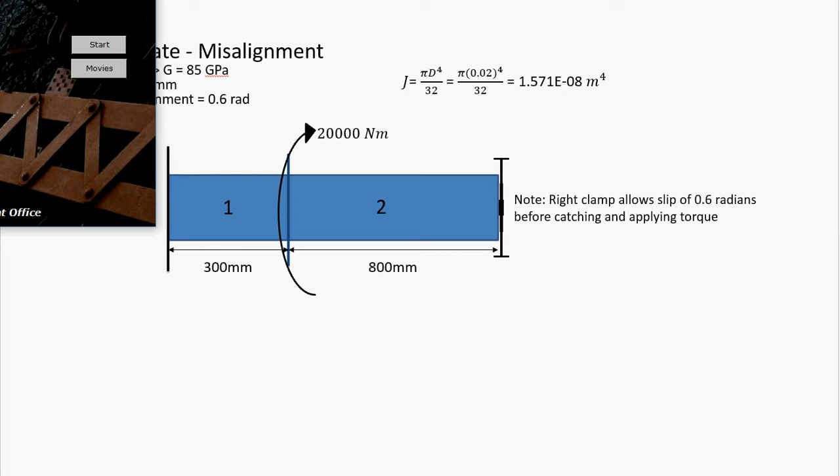So we're going to go through the standard 3 or 4-step process, and how you factor in this amount of slip or misalignment really comes down into the equation where you calculate the reactionary torque in the right clamp. So let's go ahead and get started and solve through this problem. So we can bring up torsion.

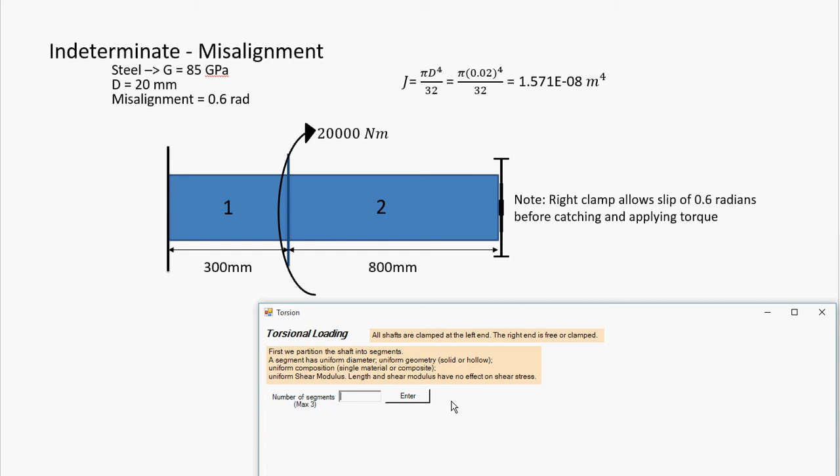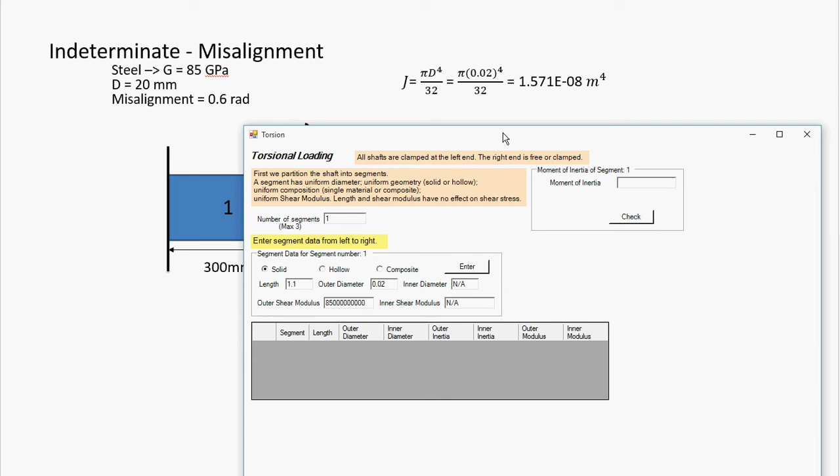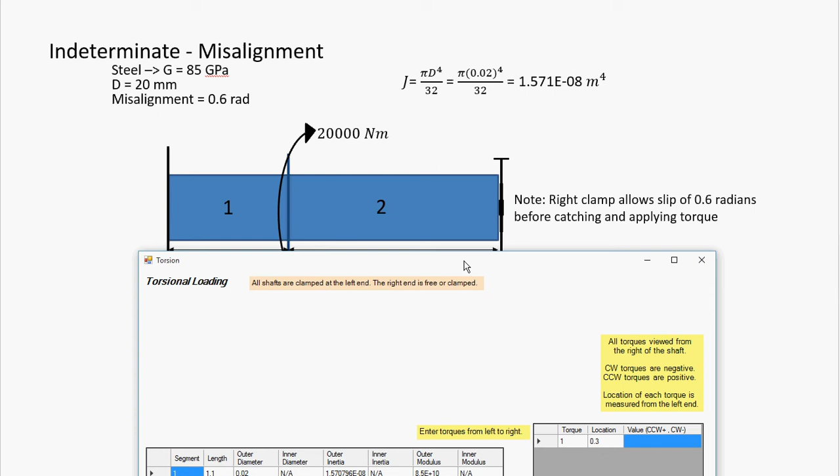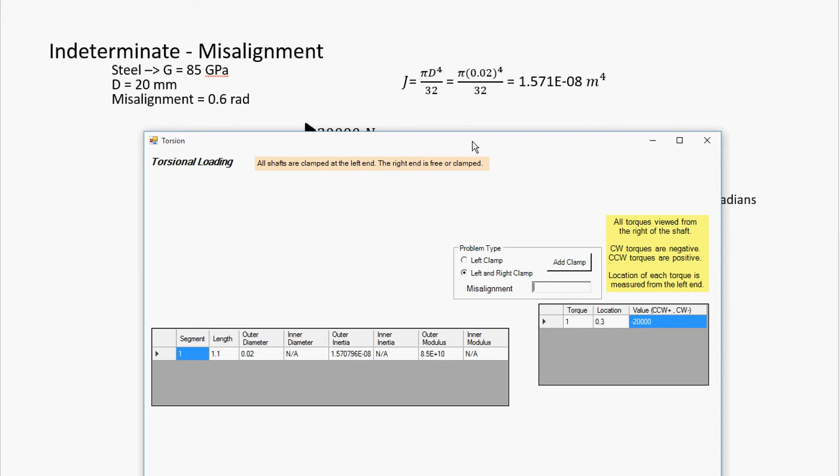Okay. So break it down into segments. It's one uniform segment. 1.1 meters, 20 millimeters diameter, 85 gigapascals. Moment of inertia, I've calculated here. Okay, 1 torque applied, 0.3 meters from the left. It's negative because it's clockwise. It's 20,000 Newton meters. Okay, so now we have an amount of misalignment, which is 0.6 radians.

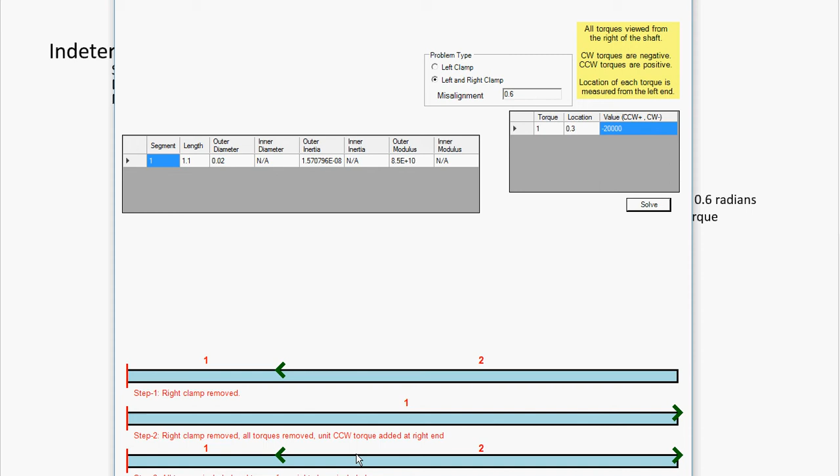Okay, so you can see the 3 main steps still the same as before. First time through, remove the right clamp, solve for the net twist. Second time through, remove the right clamp, and all torques, and then apply a positive unit torque on the right end, which would be counterclockwise, and solve for the net twist. And then with those 2 net twists, you can calculate what the reactionary torque in the right clamp is.

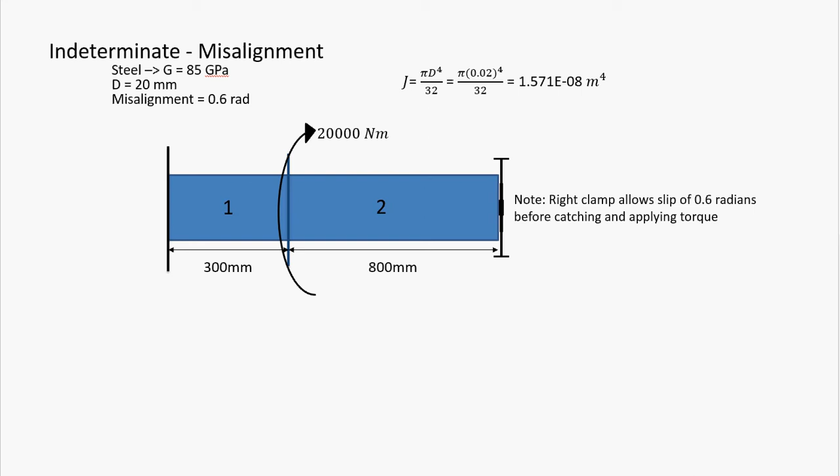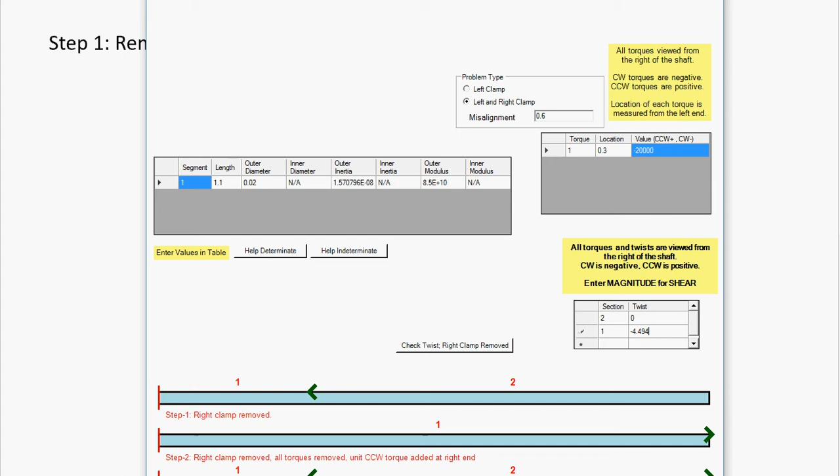Okay. So the calculation should be fairly easy because it's just a solid shaft. Of course, when you remove the right clamp, there is no longer any torque applied on section 2. So that's just zero amount of twist. Moving on to section 1, sum up your moments. I have stress and strain calculated even though we're just looking for twist, so you can just go straight for the twist once you have your reactionary torque. And that's negative 4.494 radians, which is itself the net amount of twist in step 1. And as it's negative, that means it's twisting in the clockwise direction, as you would expect, the torque is in the clockwise direction.

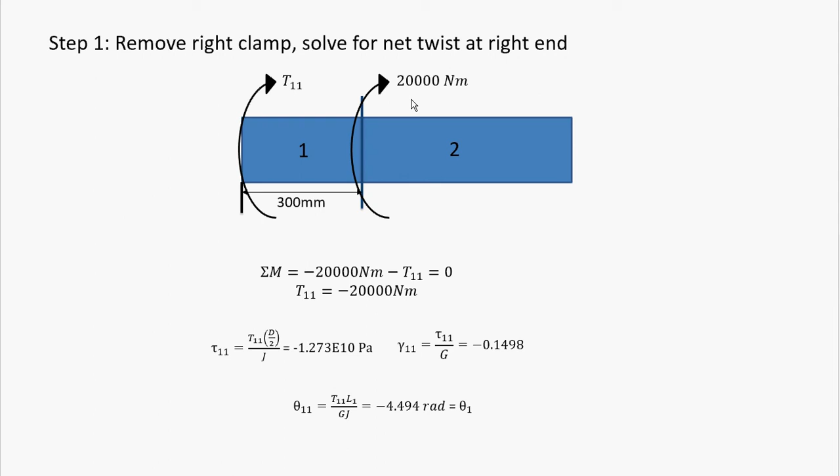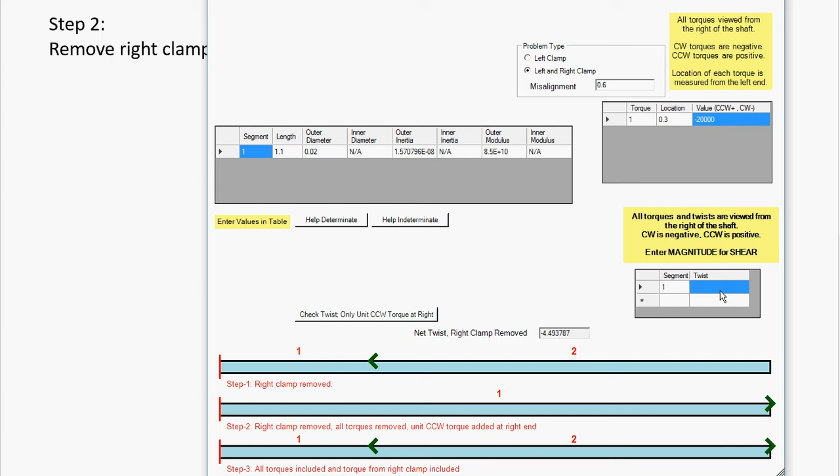Okay, step 2, we've removed the right clamp and applied a positive 1 unit load. Again, stress and strain are calculated, but we only care about the twist. And the program asks for just the net twist right up front of the entire segment. So we're going to have to sum the 2 segments' amount of twist up. Here's section 1, still just 1 Newton meter. And it ends up having less than half of the amount of twist as section 2, understandable because it has less than half the length of section 2. But we can sum those two up and we have our net twist.

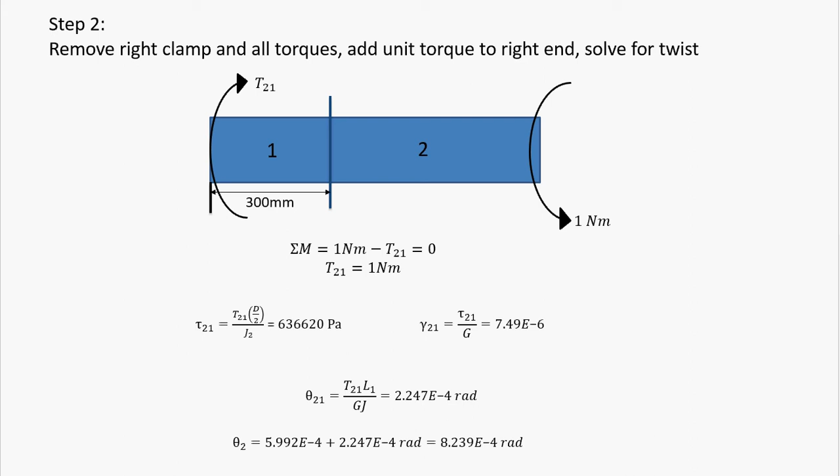Okay. So there we go. Once you put those in, then it solves for the torque at the right clamp. But that is the crucial point of this video, and we're going to go into the actual equation that you use for that. So whereas before, when there was no amount of slip, you could simply just take the negative of the net twist of step 1 divided by the net twist of step 2. However, now we have the slip involved, and the equation is somewhat different.

And remember, one of the crucial things for this equation is that the amount of twist overall is going to be greater than the amount of slip. That is, once you apply the torque, if the torque was not enough to twist the shaft at least the amount of allowed misalignment, then the right clamp would never engage, and it's just a standard determinate problem. There would be no reactionary torque. So as long as the torque is more than enough to twist it that allowed amount, then you're going to have that reactionary torque, and you're going to have to use this equation.

So it's the net twist of step 1 divided by the magnitude of the net twist of step 1, then multiply that by this magnitude minus the amount of slip, divide by net twist of step 2, which comes out to 4,726 Newton meters, and this still follows standard sign convention. And you can see this is also the same value that our program has given us.

So once we have that, then you can apply that in the right end and solve as a standard determinate problem. And this time, the amount of shear stress is actually needed to put in the program. So this outer torque is going to be that 4,726. Remember, for shear stress, you want the magnitude values. Okay, and the amount of twist.

Finally, section 1. Adding into that summation of moments, we have that counterclockwise amount. And as you can see, this comes down to a reactionary load that is negative, so the actual reaction of the left clamp is going to be counterclockwise. As you would expect, both clamps are trying to turn it counterclockwise as the load is trying to turn it clockwise. Don't forget magnitude of shear stress. So even though it's negative, I'm going to put in positive its magnitude. And finally, the amount of twist.

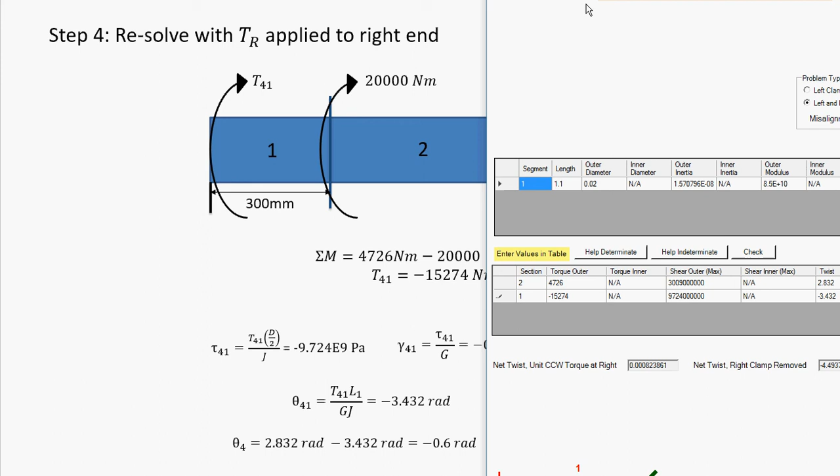Okay, and do notice that when you sum up these two amounts of twist, the final net twist is negative 0.6 radians, which is the allowed amount of slip before that right clamp was going to catch. And it's negative, which means it's clockwise. It's in the direction that it should be with the torque. So intuitively, it makes sense.

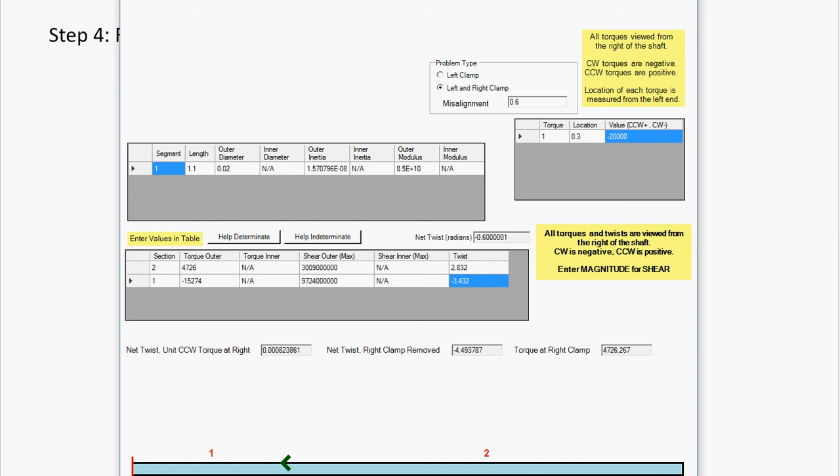And that's basically it. That's how you approach it when you have an allowed amount of slip. It's just that this equation is going to be different. And remember, as long as the amount of torque is going to make it twist more than the misalignment amount, then you're going to have an indeterminate problem. If it's not going to twist it enough, then you just have a normal determinate problem, because you're never going to have that reaction from the right clamp.